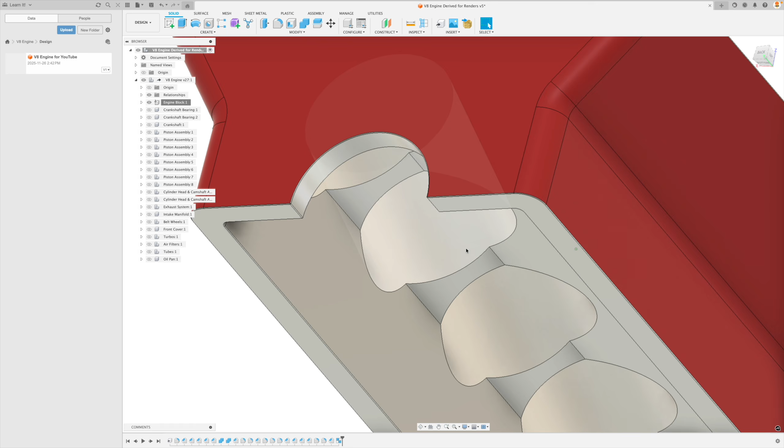In the second tutorial of our V8 engine series for beginners, we will model the engine block. This will be presented in two parts, as there will be a lot of fundamental principles of design taught, including how to create a new component, extrude tool basics, sketches, circular pattern, two-sided extrude, how to change the material and appearance, and so much more.

So basically we're going to take this, and there's a lot of little details here that you probably will miss, but that's why we're doing this together. We're going to learn how to read drawings and make them right. So first thing we're going to do is look for the root sketch feature that everything else is based off of. And if I look really closely, I see that the first cylinder bore has a lot of dimensions coming off of it. So that's the one I'm going to pick.

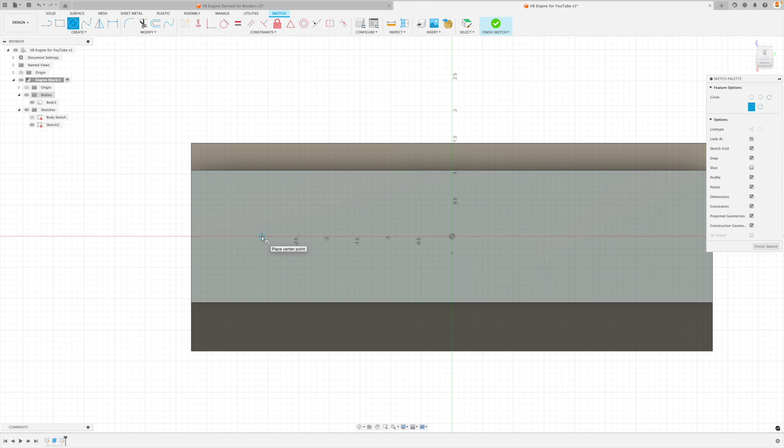Let's go center circle. I'm going to place my mouse cursor right here on the x-axis. Here's a fundamental thing within Fusion. Despite our mouse cursor snapping to the grid, it doesn't mean that it is constrained. So if I create a circle right here, don't worry about the dimension. I guess I could put it in right now, but don't worry about it too much.

Okay, look at our center point. It's not constrained to anything. So even though I snapped it to the x-axis, it's not constrained to it. We have to constrain it. So go to your horizontal vertical, grab your center point, grab the origin, and now we're getting rid of its degrees of freedom. We can move it left and right, but we can't move it up and down. So that's perfect. That's all that constraints are. We make sure we are accurate and our design is perfect. So this is perfectly in line with the center.

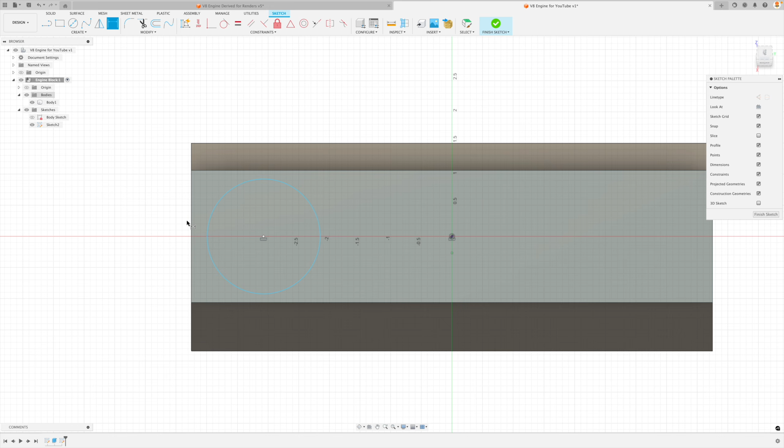Now, where's our dimension coming from? D for dimension, grab the outside edge and the center point. We can actually click anywhere on the circle in this instance. Because a circle has an infinite amount of points, Fusion recognizes when we pick a circle, it selects the center point for us. So I'll prove it to you. There we go. Little side point, everyone.

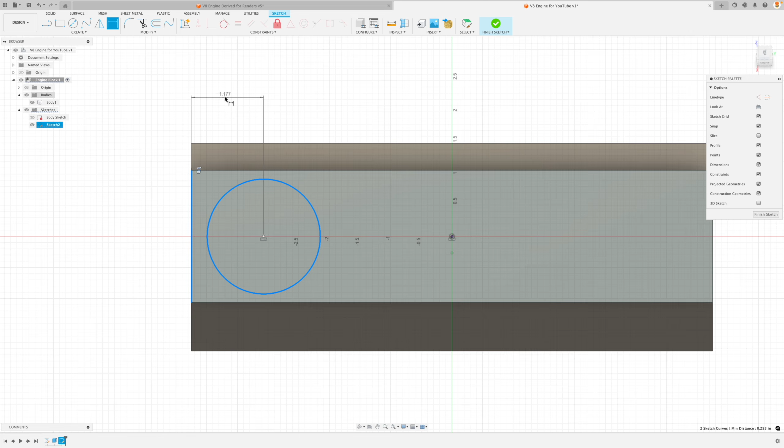If we want to go to the point of tangency on the circle, go D for dimension, select the line, and before we pick the circle, right click. And here you go, pick circle arc tangent. And then we can pick any point that's tangent. So it's either this or that side. And here we can specify that little dimension right there if we want. But Fusion defaults to just the center point. So there we go. Place the dimension where it is on our drawing, 1.1875. Awesome.

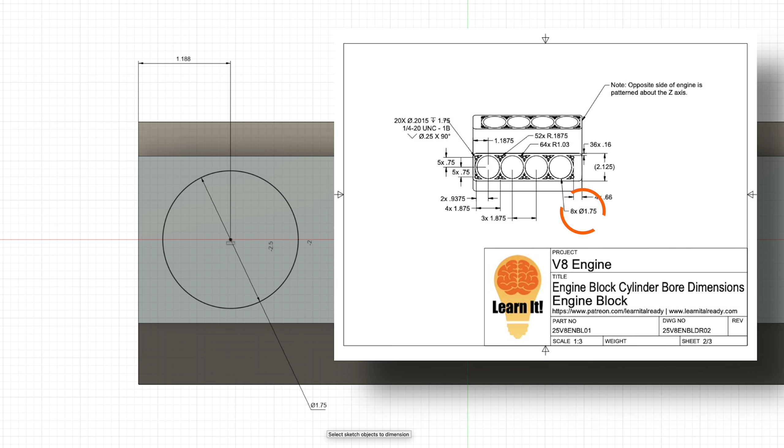Why is our sketch still not constrained? What's missing? The diameter. So let's grab this, move it on down, 1.75. You see that we can't make our sketch within Fusion look exactly the same as our drawing, and that's okay. Basically, we're trying to put our dimensions in approximately the same location, and that's just for visual reference to quickly scan with our eyes, are all of our dimensions accurate.

You'll notice here 1.188, if we hover over it, Fusion just defaults to 3 decimal places. So if you hover over it with your mouse cursor, you can see 1.1875, so that's accurate. And what I always like to do with my students is I like to encourage them to highlight or check off each dimension so we're not missing anything. Great, let's keep on going.

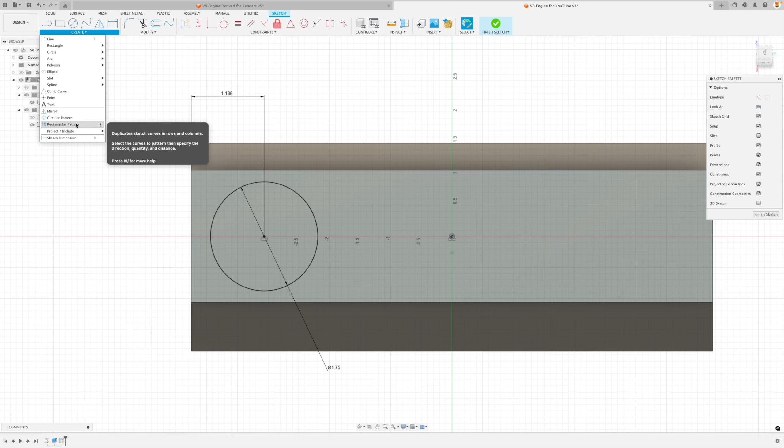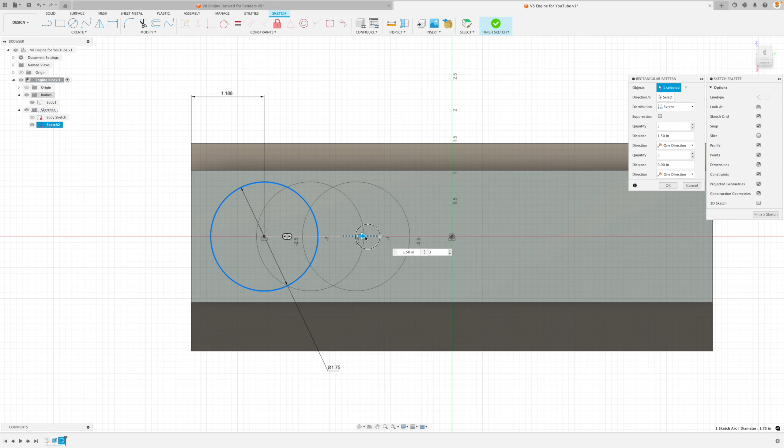We see that these 4 bores are equally spaced 1.875. So why don't we do that now? Let's go create, and I'm going to go to rectangular pattern, select the object, and now let's talk about this. This frustrates a ton. Here we have 2 different directions. We've got a quantity of 3 and a distance, and we've got quantity of 3 and a distance. Both of them want to go one direction. Instead of fiddling with this dialog window, grab the arrow of the direction you want to move in. So I'm going to grab that. There we go.

How many bores do we want? On our drawing, it says 8, and that's including the 4 on the other side. Okay, so let's go quantity of 4. And now instead of extent, so that's from center point to center point, I want to go to spacing. And now you can see we have a couple different ways of inputting this. We have this little dialog window right there, and we have this big one over here. They're exactly the same thing. This is just closer to our mouse cursor. So I'm going to type in 1.875, just like that.

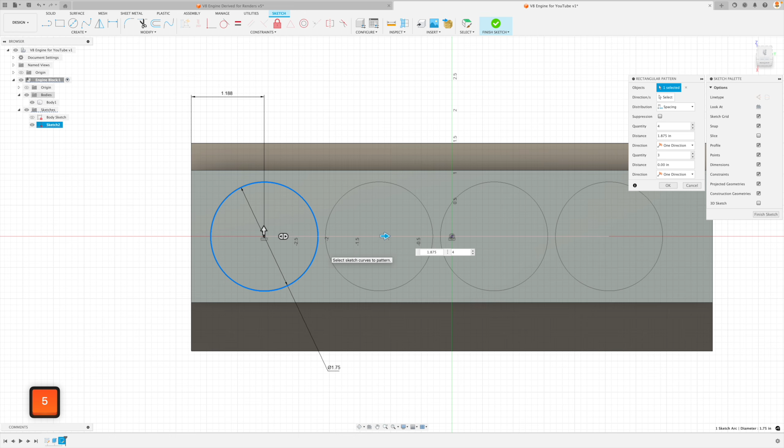Enter. Everything is fully constrained. This is looking great. This is looking really cool. Now, here's a funny thing. Remember I talked about the dimension being placed over here, where on our drawing it's over here. Why don't we just switch it?

Now that we've patterned that, let's delete that. All of our circles turn blue. Now if I constrain or dimension this 1.75, all of them turn black. All of them are fully constrained because they're copies of each other. That's what patterning does. Very good.

Let's keep on going. There's a million things on our drawing here, so let's figure it out together. This is great. Because I've already designed this, I know how I would approach this, but you might approach this a different way. So I encourage you to pause right now, try and do the rest of this, figure out what's going on in the drawing if you can, and try and design it. It's extremely easy if you know the technique. If you're ready, let's keep on going.

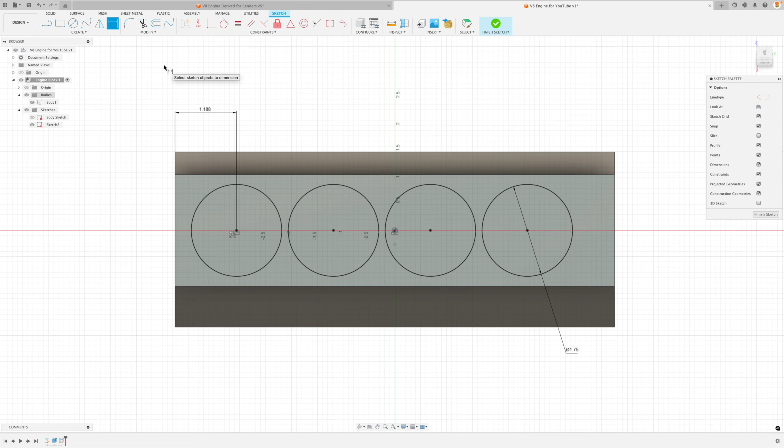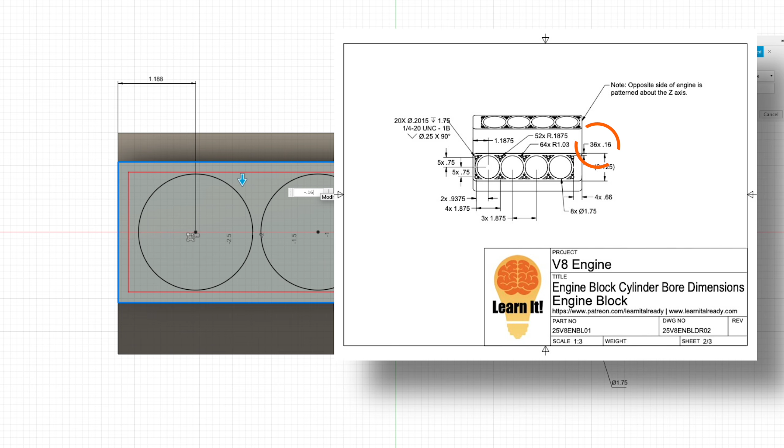I'm going to create an offset right now, and I'm going to pick this entire rectangle. Move it on in, and you can see we've got a value right here. This is minus 0.16. On our drawing, it says that there's 36 times that. Well, when you calculate all of them all the way around, there's 36 features that have this dimension on both top and bottom. So I'm going to go minus 0.16. It's minus because it's inside.

On drawings, you never really see a negative integer. I don't think I've ever seen one. So you have to interpret that within Fusion. So I'm going to go minus 0.16. So that's 0.16. Bring it all the way on over here. There we go. Let's put it up there. It won't allow me to put it over off to the right here. So 0.16.

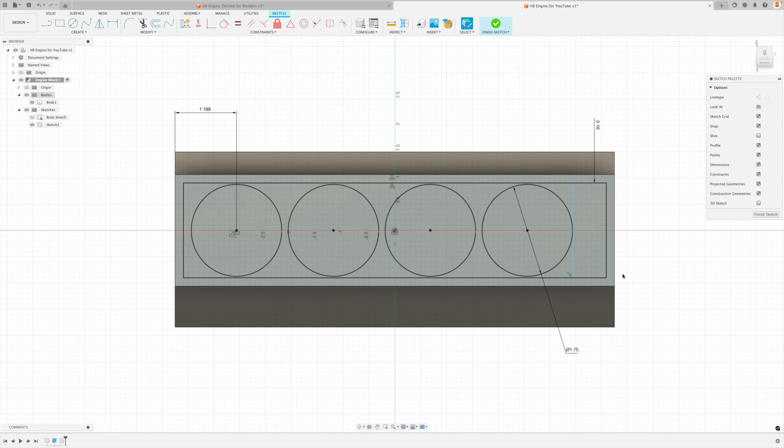Now here's the thing. This line on this side, let's put it in, is not 0.16 away. This is the special exception. So if I go D for dimension and I go like this from there to there, perfect. This is 0.66, just like that. So that looks great. Let's not try and overlap any dimensions. Sometimes people will put their dimensions like this and you can't see it. So just make your sketch look pretty. If it looks pretty, it will work.

Okay, very good. So what else do we have? This represents all those different features around our drawing, but then we also have some radiuses, 52 radius, 64 radii, I should say. So let's do that. Center diameter circle. These are our bores, right? Let's go in and create the other ones as well. This one here is going to be a radius of 1.03. So remember how to turn this into a radius. D for dimension, select our circle, right click, radius. Okay, this is going to be 1.03, just like that.

And then we have our 52 times radius specified there as well. Now, what this is representing are the inside of all those profiles. So why don't we do this? I also would like to pattern this circle down the line. Very simple. Go into your pattern, right click. We can edit it or we can double click. It's the same thing. Objects. If I want to copy an additional object, hold down Command and select the other circle. And that adds all of them right there. Brilliant. There we go. This is looking really good.

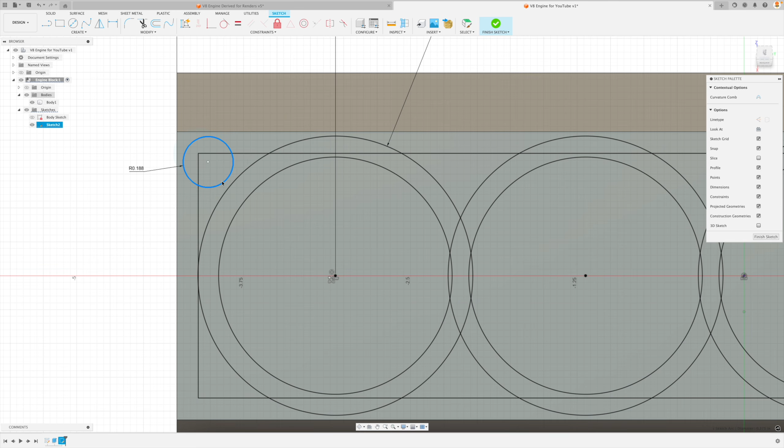I could delete one. Actually, that was the correct one. No, it wasn't. You can see this circle is still constrained to that endpoint. So that was the wrong constraint. I can try the other one. Yeah, there we go. Okay, so let's just do that. You can recreate a circle right there, but the endpoint doesn't belong right there. That was my bad.

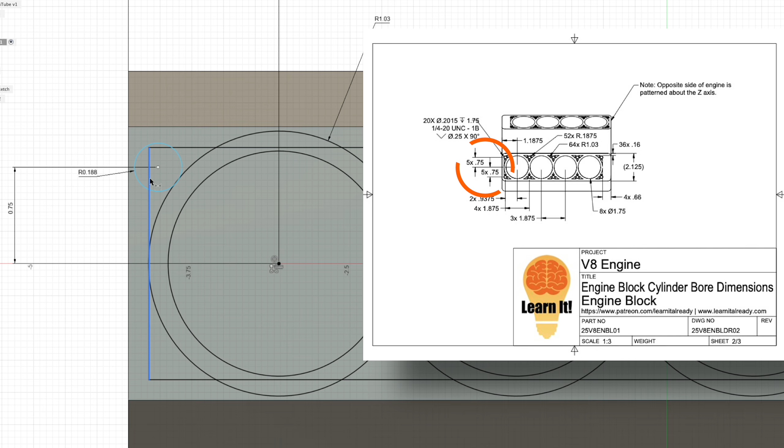Here we go. Let's specify the dimensions. D for dimension, center point to center point. Do you see what this value is supposed to be? It's supposed to be 0.75. This value to the center point, the horizontal value, is supposed to be 0.9375.

There we go. So this is actually going to be the cutout. This is the other cutout right there. This is looking great. Very good. Now here, we're going to pattern this sketch entity all the way around right here. And this is going to be fun.

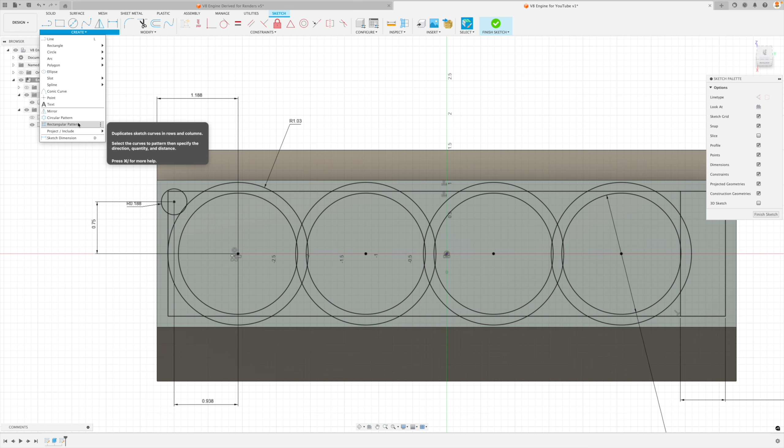Let's go to create rectangular pattern, pick our circle, and here we have two directions. So I'm going to go this direction first of all, and then pull your arrow down. Pull it in the direction you want to go first, and then adjust the values after. So in our down direction, change this to a quantity of 2, and we can even pull it into place.

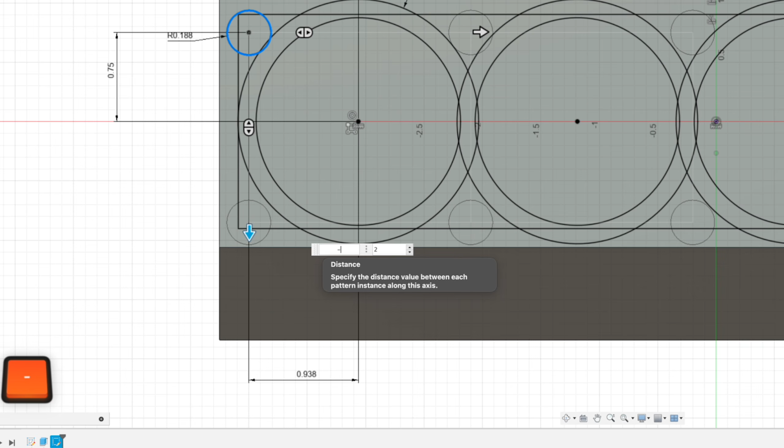Let's grab our dimension right here, and this is supposed to be 0.75 times 2. This is where we have to do a calculation. We're going downwards, so it's a negative value, minus 0.75 times 2. Now in our other direction, don't hit enter yet. Grab our arrow, and how many do we want?

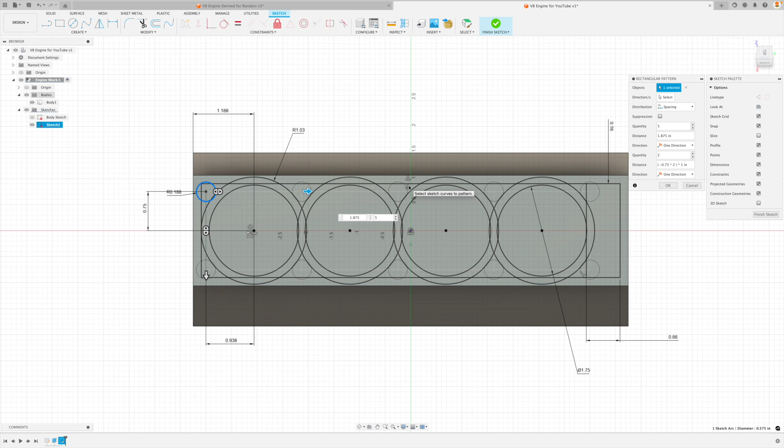Quantity of 5. And the distance between each of them is the same as our bore, 1.875. There we have it. And you can see they're all perfectly placed right here. So this is looking really good. Enter. One mistake I've made, this 0.66 dimension over here is not from this edge, but from the outer edge.

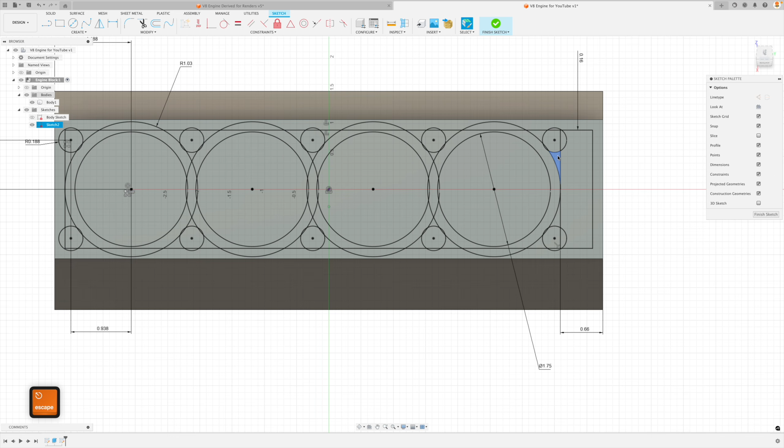So I'm going to delete that. Just grab your arrow, pull it back a little bit, doesn't really matter. D for dimension, select those two lines, and this is supposed to be 0.66. So all of these closed profiles are going to be cut out. Otherwise, I think that we've got everything on the screen.

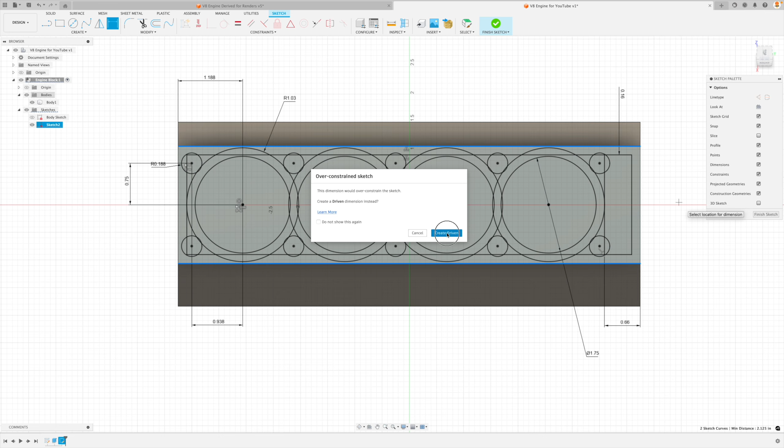Now, one thing you'll notice is that there is a bracketed dimension, 2.125. So if I go D for dimension and I select this line and that line, this will be a driven dimension. So it's based off of something else we've already defined. And that's why we see a bracketed dimension on our screen. If it's defined in another drawing, then you'll see in our sketch, this should be also a driven dimension. So that's what that's referring to.

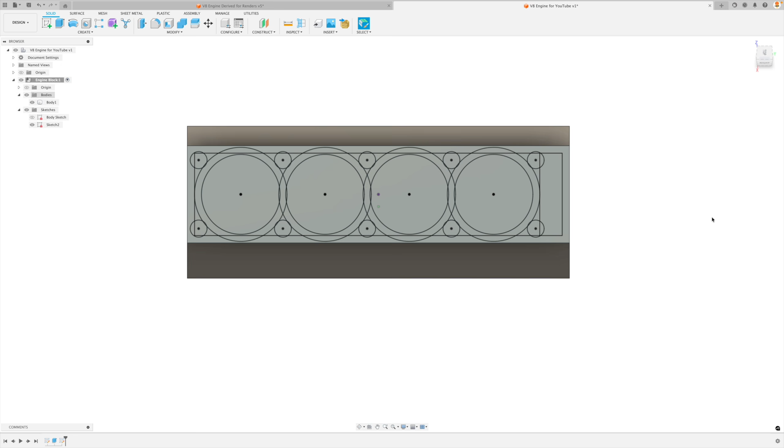This is great. Let's go finish sketch. Now we've got everything representative of what we want to cut out in our part. Now, do we go ahead and use the extrude for these? We could. There's nothing wrong with that, but I'm not going to use extrude. I'm going to use the hole tool.

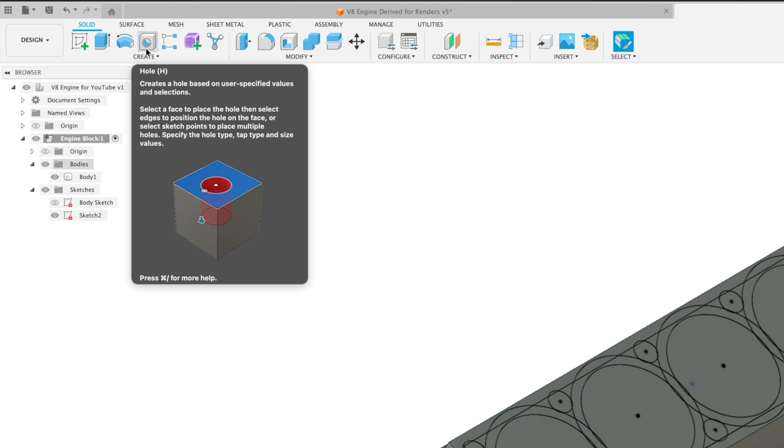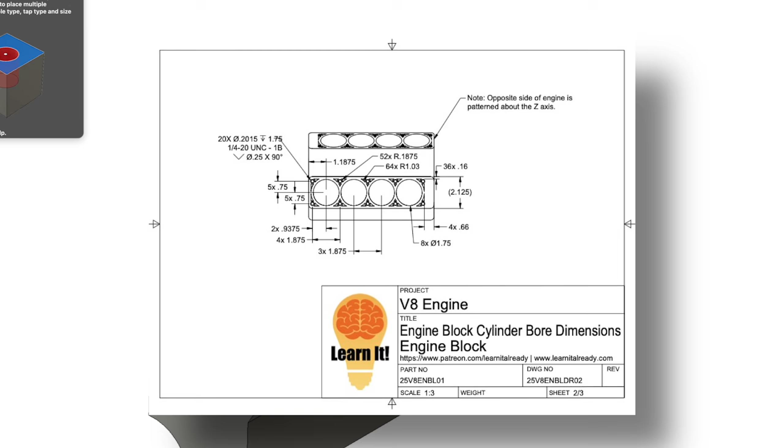The reason is when we use the hole tool, this has a bearing on our drawing in the future. When we look back at our drawing, you can see, for example, the 1/4-20 definition. That's all automatically inputted by Fusion. It makes life a whole lot easier. Rather than inputting all those symbols and all that structure, Fusion does it automatically and it does it professionally for us. So I would like these cylinder bores to use the exact same method.

So let's click on the hole tool. I'm going to pick the center of all of these. Very good. Distance, let's leave this for a second. We want simple, that's fine. Hole tap type, simple, don't worry about this. We just want to focus on the diameter. It's supposed to be 1.75.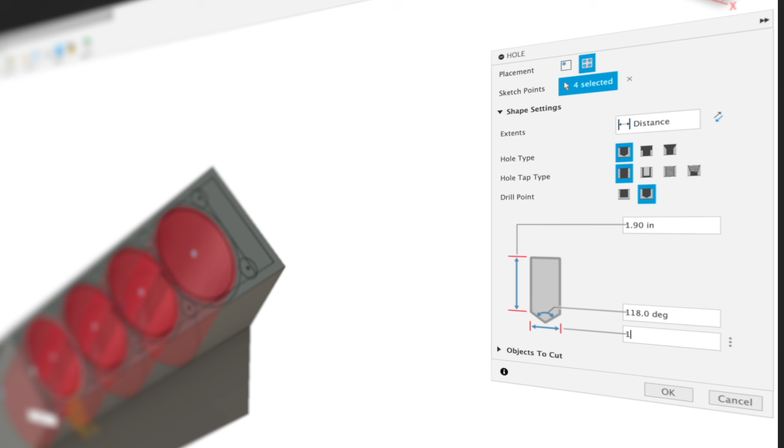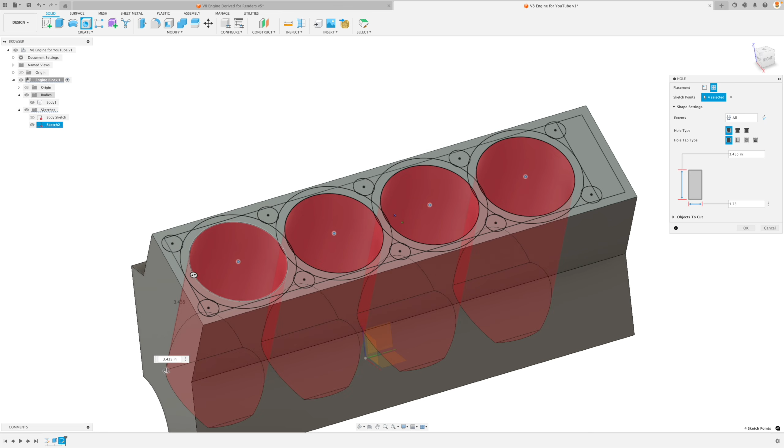Now go distance, and we're going to go all. So now this goes all the way through right there. This is looking great. And why is our dimension a little bit off? That's why, because it's not 1.875, it's 1.75. There we go. All right, perfect. We've gone all the way through.

On our drawing, it's now not going to specify a distance, because the distance is actually right here, 3.435. We don't want a distance. We just want to say to go all the way through. And that's what Extents does for us. So let's go OK. Our sketch now disappears. That's fine. Let's go back to it.

We should rename it at this point, and I'm going to call it something like our cylinder bore face sketch. There we go. Let's bring it back. Let's make it visible by clicking that eye. Everything comes back. Let's put in our other holes, our tapped holes right now.

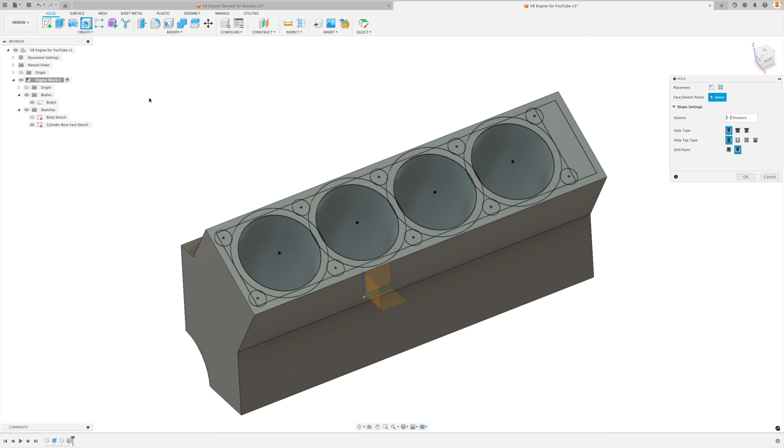So we'll go back to our hole tool, and I'm going to pick all these other points. And don't worry about how big the hole is right now. That's fine. Just pick all of your points, just like that. And now we are going to just go down the line here. This is actually a countersunk hole. That's what you see, that V on our drawing, 0.25 by 90.

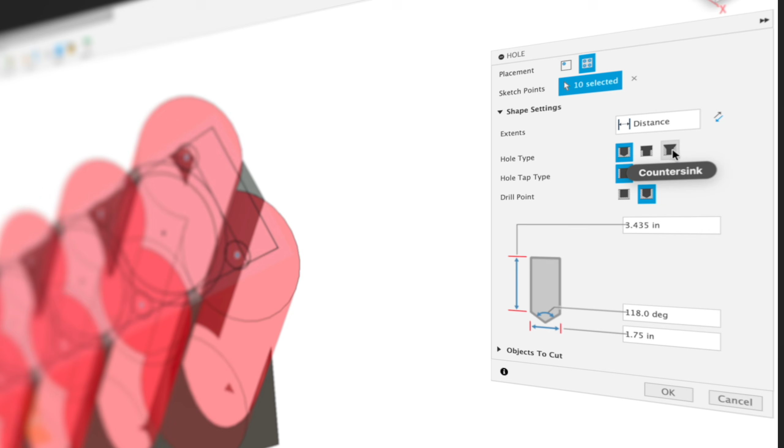So go countersink, and let's just put in our values. This is actually going to be 0.25 by 90 degrees. The depth, do we have a depth here? Yes, it says down 1.75.

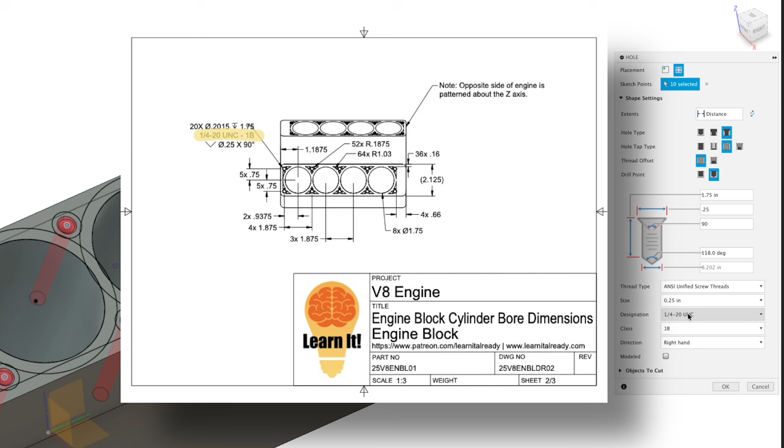118 degree, we don't really worry about that. That's just dependent on our drill tip. And then our diameter. We don't need to put in a diameter here because we're actually going to go to tapped. Fusion assumes that we want a number 12 tap. We're just going to pick that size and change it to 0.25, which is 1/4 inch. Supposed to be 1/4-20.

This is looking great. And when we look at our 3D model, you can see that we're going down 1.75 inches. Everything is great. Class is 1B. We are good to go. Let's go OK.

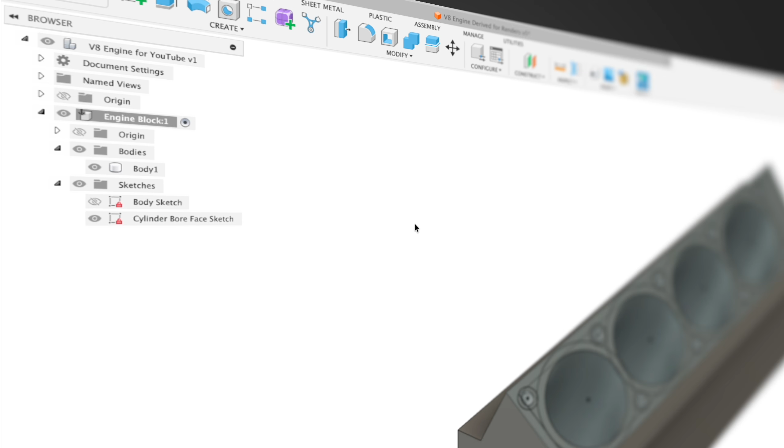Here's another tip. We had to make our sketch visible to see this sketch again. Once we've made it visible, Fusion will keep it visible. Our first extrude or anything we do on that sketch, Fusion will automatically hide it. It assumes that we don't want to use that sketch anymore. But here we want to use it, so we've made it visible, and we're going to keep on using it to create the other 3D features as well.

And where are those? So each of these closed profiles right here, the dimension is somewhere. Can you find it on sheet number 3? Well, there it is, 1.5 inches deep. So I'm going to select all of these different closed profiles and then extrude them 1.5 inches in. This is going to take a while to select all of them. Let's speed it up.

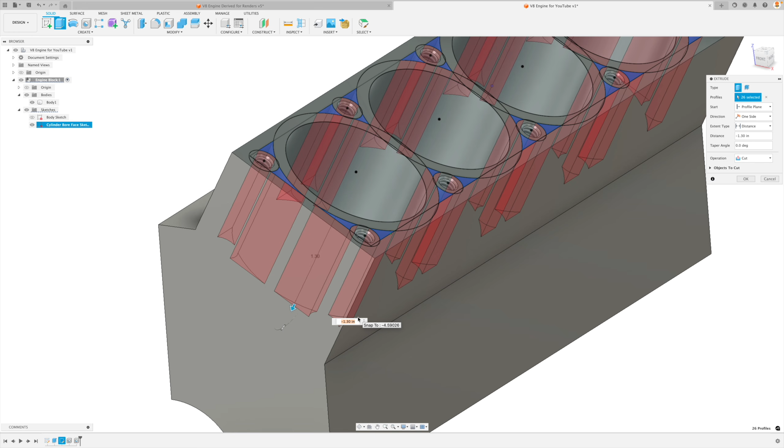Okay, now that I've selected all of them, I can go down. And here, if you don't know which way to go, just grab your arrow, bring it on down, and it shows that it's a negative value. So this is supposed to be negative 1.5. Press enter.

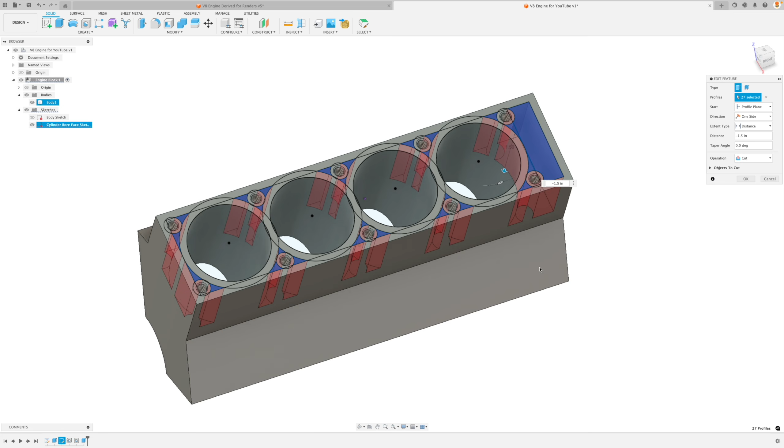If you've accidentally picked the wrong closed profile, don't worry about it. Just go into your extrude in your timeline. And here you have 27 selected. Let's assume that you've accidentally selected that. Oh, well, we don't want to extrude that. So go back to your extrude, hold down Command, and click it, and it will deactivate that closed profile. So go OK. Now we want to hide the sketch, and this is looking really, really good.

Okay, so at this point, this is where the benefit of using mirroring, or better yet in this instance, circular pattern comes in. What is the difference between both of them? Well, using mirroring will actually create completely different holes and features on the other side. It's like a brand new body. They're not the same. Although they look the same in this instance, remember that mirroring creates a brand new body.

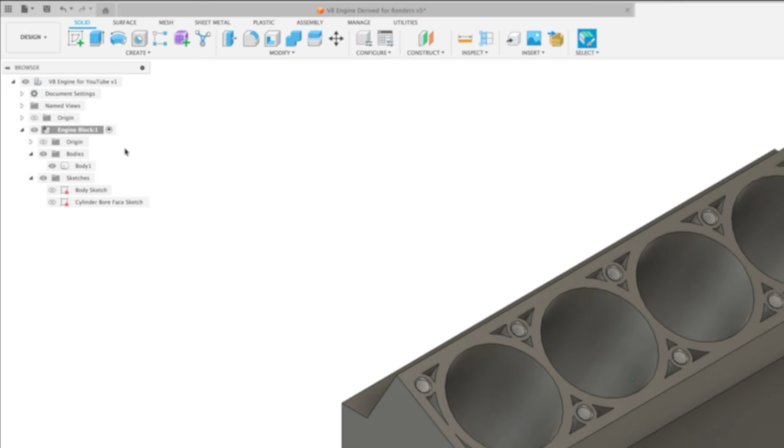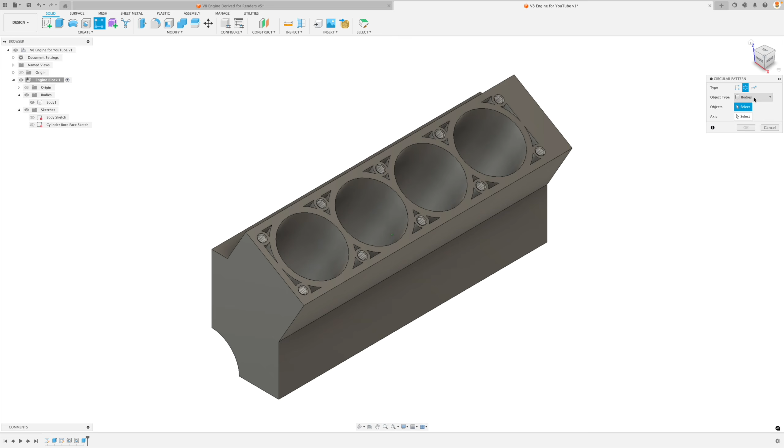We want to go to pattern. And although we don't want rectangular pattern here, look at what happens. If I click on that, we can actually pick other options of our pattern. And that's in the create drop-down menu as well. Hovering over pattern, we have a bunch of different patterns that we can pick. Well, they're right here as well. Let's go circular pattern. I'm going to keep it on bodies, and I like to pick this body.

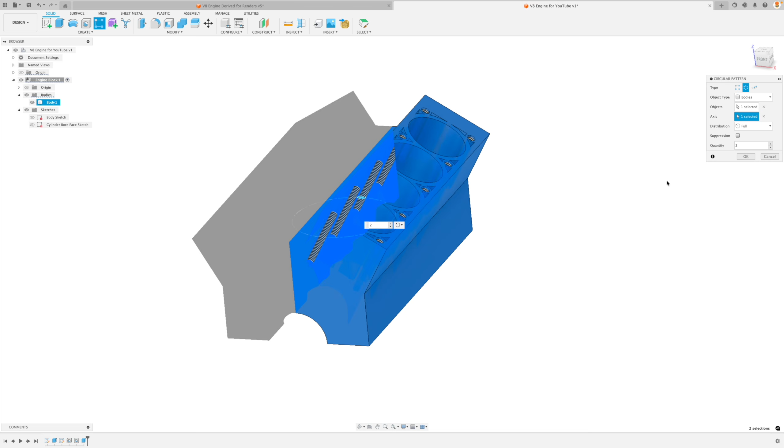And now here's the whole point of drawing this and building it around the origin. So let's go axis. Our origin shows up, and I want to pick the Z axis. Now this is putting 3 bodies in. So let's just change it to 2 bodies. Let's go 2.

Now look at the difference. You can see that this body over here, we've got a short distance between the sidewall and the bore. And here is a wide distance. Same thing over here. Here's the wide distance and here's the short distance. That's exactly what we want because our crankshaft and our piston assemblies need to be staggered. That's how an engine works. So that's why these cylinder bores are staggered a little bit.

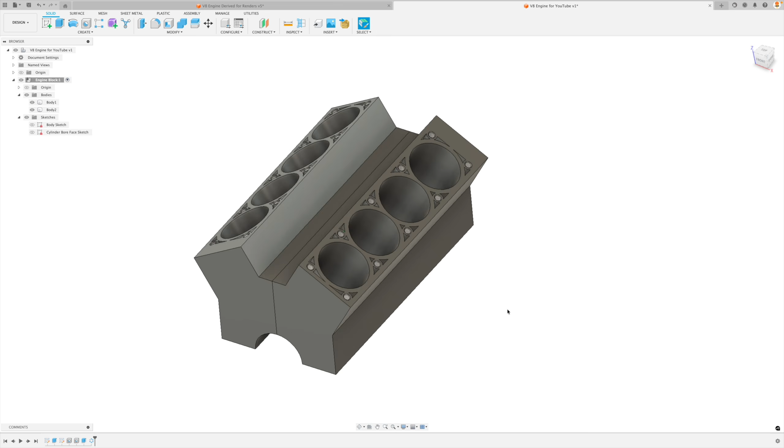But the reason we can do that so easily is by creating a pattern using the circular pattern tool. It's hard to wrap your head around that we're using these rectangular looking parts with the circular pattern tool. But that's exactly what we want. We wanted them to revolve around that Z axis right there. Now, how many bodies do we have? We have 2 bodies. So I want to combine these into 1 body. So I'm going to go up here to our Modify menu, Combine.

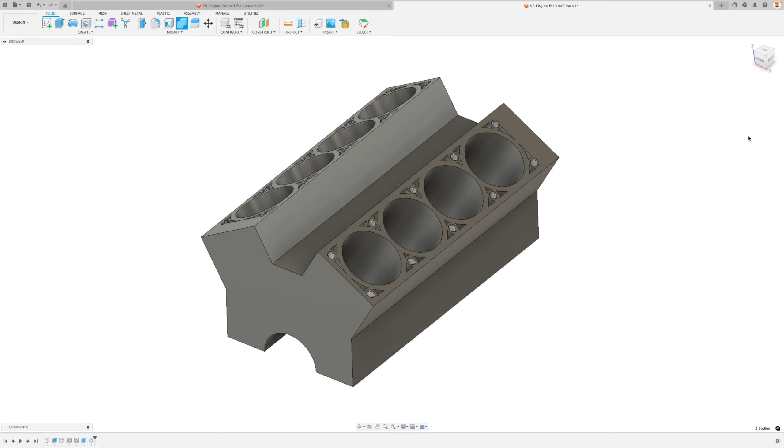The target body, keep it as body 1 as our target and our tool as body 2. It assumes that we want them joined together. Let's go OK. And now we have 1 body again. That seam disappears halfway down our engine block.

And let's just look at our timeline for a second. Look at all the things that we have here. This is everything we've used to create our engine block so far. So our first sketch, our body sketch. This is our first extrude. This is the cylinder bore face sketch. If we hover over that, it actually tells us which one it is.

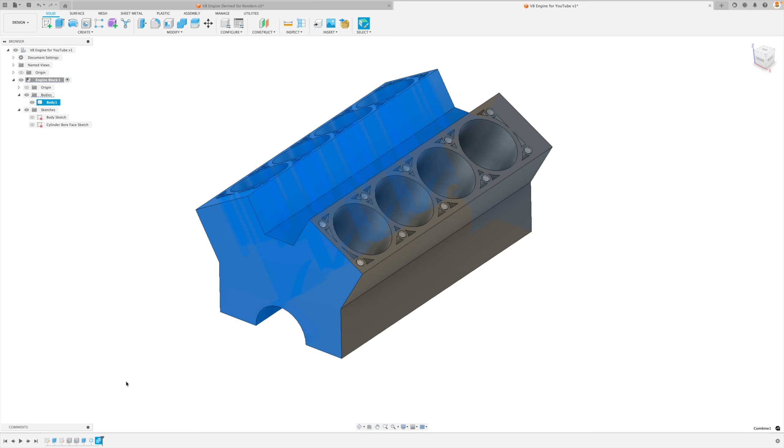We've got our cylinder bores. We've got our bolt holes. We've got our extrude. Those are a little reliefs right there. Our circular pattern wraps that body around and then it joins the 2 together just like that. So this is looking great.

Now, what else do we need to do? We need to hollow this body out on the inside. So let's do that now. Let's create another sketch. And actually we can create this on any face we want. Just to prove it to you, I'm going to do 2 different ways. Let's pick the XZ plane.

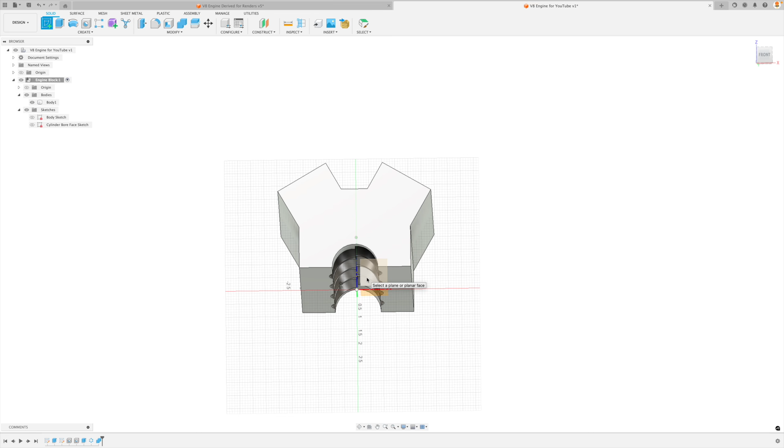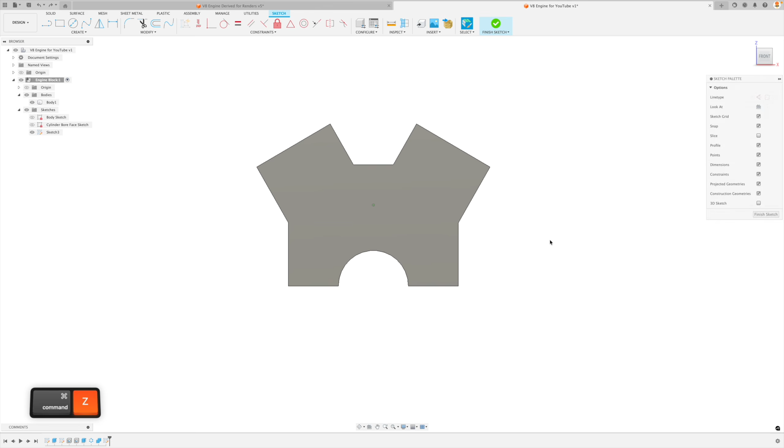Now we've got this body right here. I'm going to go slice and we can see right through. The problem with doing this is that it's a little complicated. It's hard to see our sketch profiles that we want to create. So instead of doing it this way, feel free to try it if you want. It's okay. I'm going to undo that sketch. I'm going to create another sketch on this face.

Now, I am going to create this as a hexagon. So let's create a polygon and we can just do an inscribed polygon, start at our origin, move this on over, and this dimension is supposed to be 1.825. Just like so. Is everything locked in? No, this needs to be horizontal.

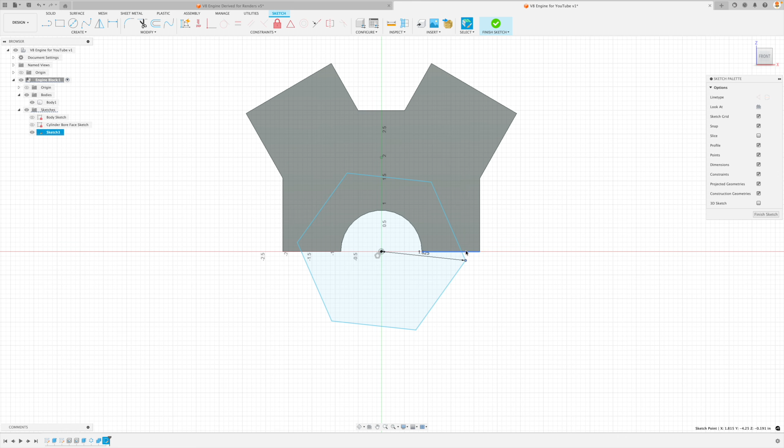So actually, hold on a second. It needs to look like this, doesn't it? So this line right here needs to be vertical. So let's just click it, vertical, horizontal constraint. It automatically applies this vertical constraint to it. And this dimension is actually wrong. I picked the wrong type of polygon. So I'm going to delete that.

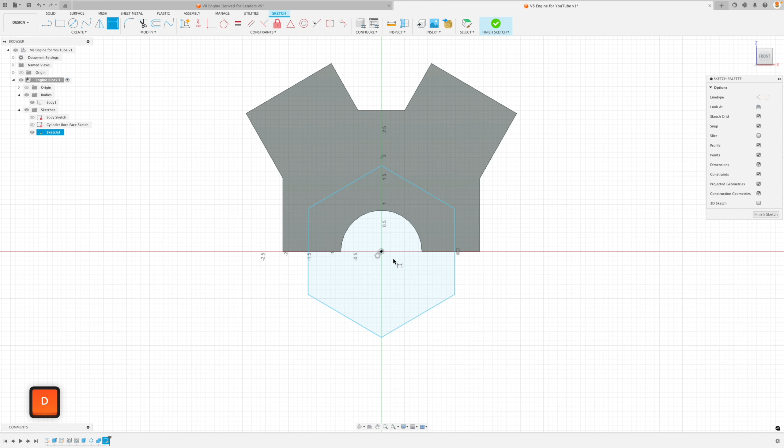And now it's very simple. Just go D for dimension. Go from the center to that line. There we go. 1.825 is the dimension. It also has a reference 0.3. This is just to verify that we've done this right. So create a driven dimension, brackets just like we see on our drawing, 0.3. This is looking great. So let's finish that sketch.

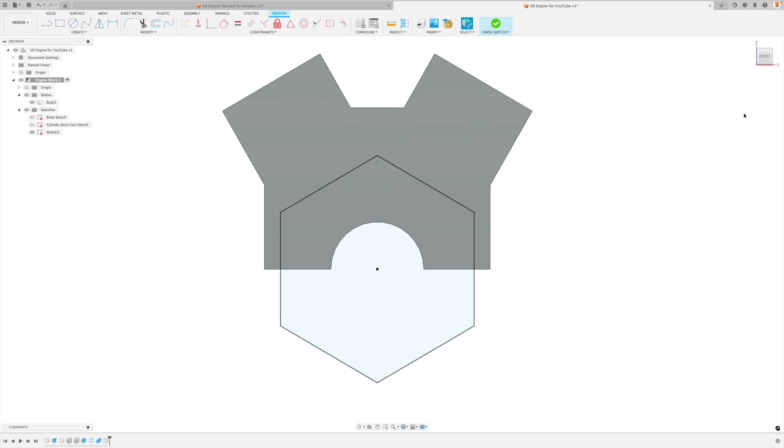And now what we can do is use this closed profile to do the entire cutout of our engine. But obviously we don't want to go all the way through, so I'm going to show you a brand new trick here. Let's go to Extrude, grab that profile, and here's a little tip. So we want to go this direction, right? But instead of one side, I'm going to go 2 sides. And usually we think of 2 sides going one way and the other, but in fact we can grab 2 sides and go in the same direction.

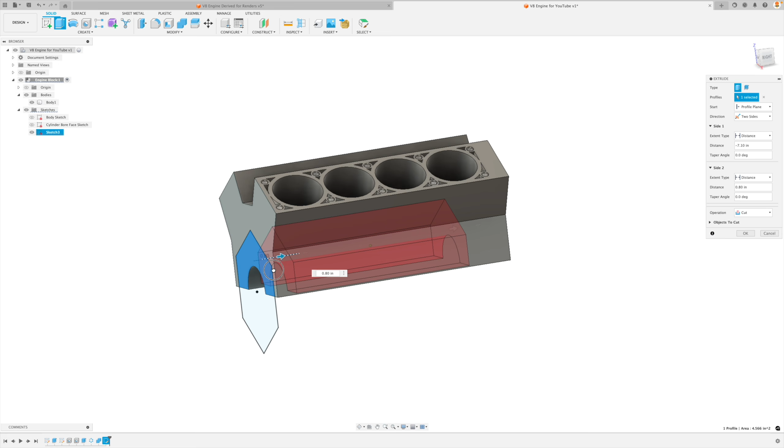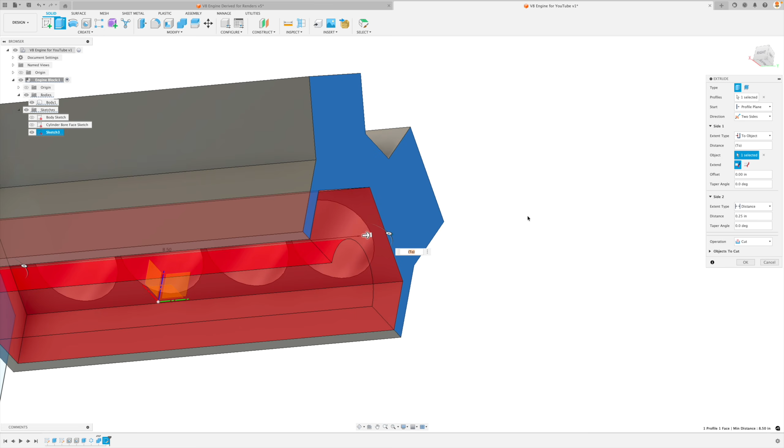So the first one, this is going to move on over 0.25. So the cutout's going to start 0.25 from that wall. And this one over here, look at this. Instead of doing the math, let Fusion do the calculation for you. Instead of distance, go to object, pick that face, and then we've got an offset over here, minus 0.25. There we go. So we've got this beautiful cutout. Let's go OK. It hides that sketch. We've got this entire block looking great right now.

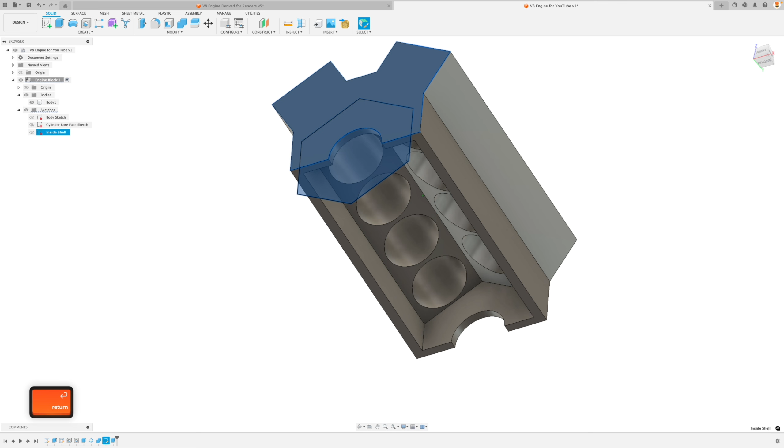Let's just rename that sketch over here, and we're going to call it the inside shell maybe. Call it whatever you want. This is just to easily refer to it later on. It's best to get into good habits with correct naming conventions and things like that, but don't worry about it too much in this course.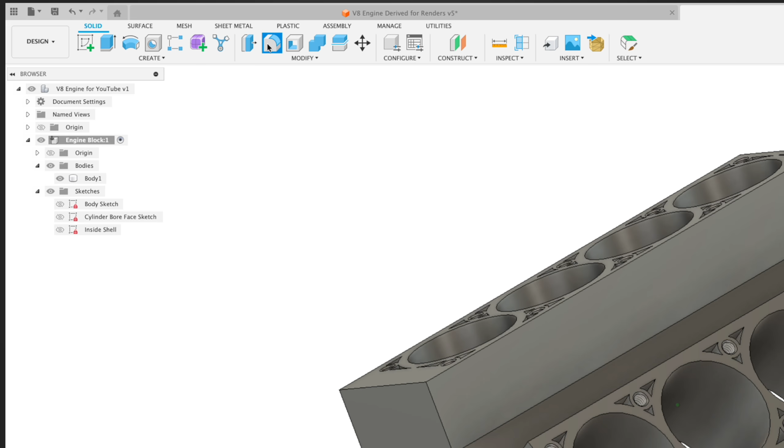We actually need to pick all these different edges as well, but by picking these long edges first, it's going to turn this line, that line, and that line into a tangent chain, and it's going to make our life a whole lot easier. So let's go 0.25, just like that. And now if we go back to fillet, look at this. If we pick that, it actually selects 5 edges with 1 click. Boom, that's 2, 3, 4, 5, and we can actually look through our part. This is kind of hard, so we're going to have to rotate.

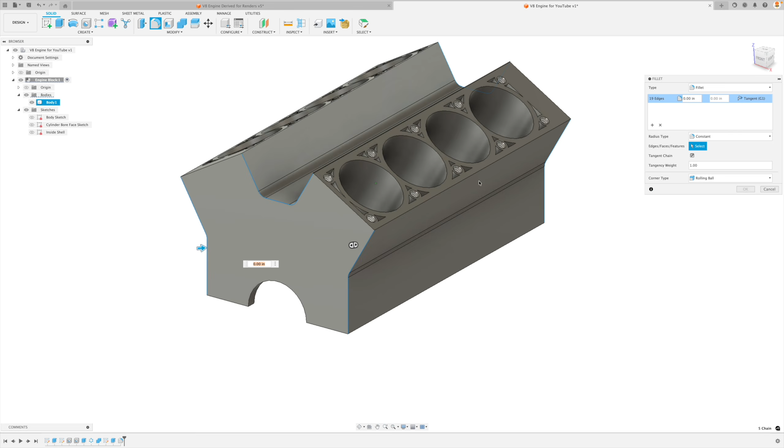That's probably easier, or orbit, I should say, and call that 0.25. So that's it right there. That is our entire engine block. Now we're not quite done yet. We have one more thing to get to.

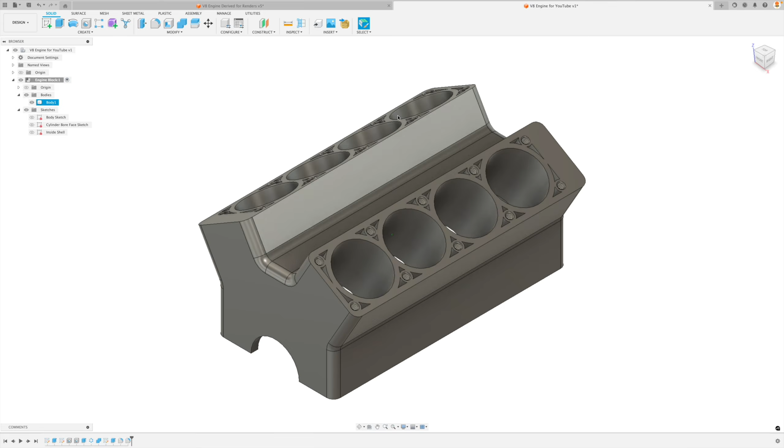So the last thing we're going to do here is we are going to turn this engine block. We want to make it accurate with its material. So let's just minimize these folders, the bodies and sketches. Under engine block, I'm going to right click, and let's first of all go to physical material. Here, we're going to go to metal and find aluminum. Let's just go regular aluminum, drag and drop. There we go. The default in the system is steel. It has to have steel in the design if that's our default. We've added aluminum, which is great.

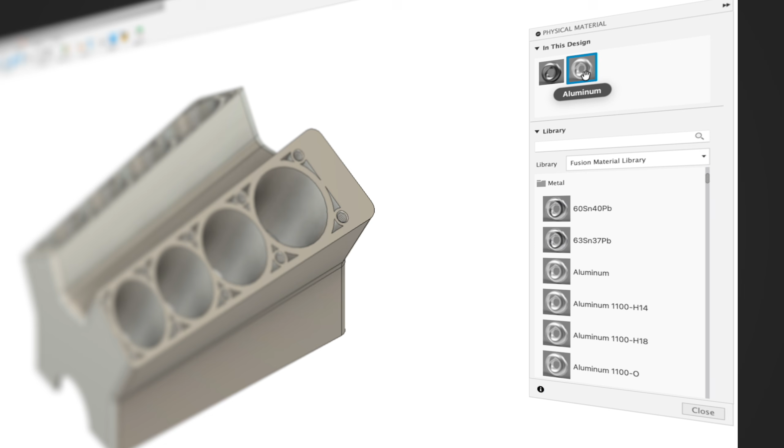But I'd also like to add an appearance, and I'm going to make this engine block red. So let's go A for appearance. Just to let you know, you can also go right click on engine block and go appearance. You can also go right click anywhere. And I believe appearance is there. No, it isn't. Right click on any aspect of our design. You need to click it first, and there's appearance down there. But just get used to A for appearance.

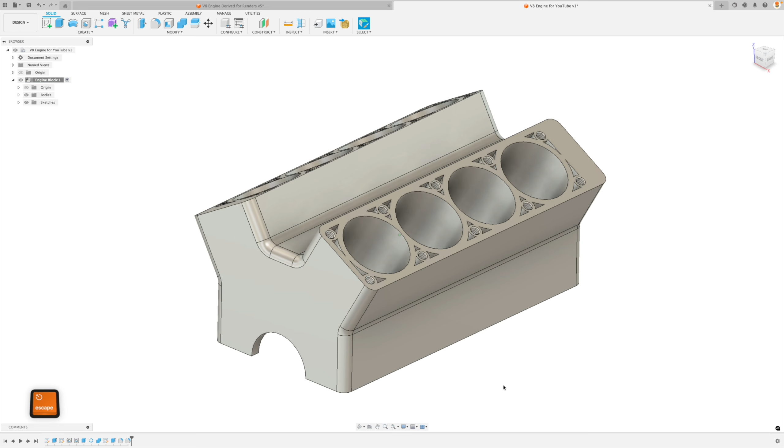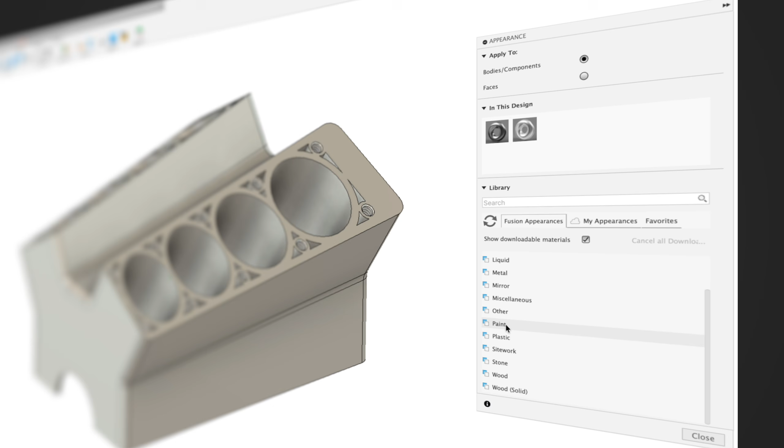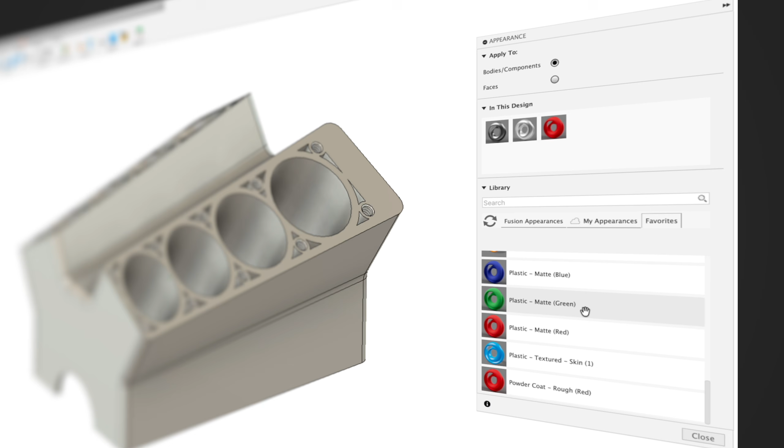A, there we go. I have selected in my favorites, I've got the plastic matte red over here. I've got other reds, but I don't want that. I would like to save in my Fusion appearances as a favorite. I'd like to save a new type of appearance. So if I go to paint, let's go there and let's go to powder coat rough. Here we go, powder coat rough red. I kind of like that. I would like to use this, so I'm going to drag it up into the design. Let's not apply it yet to anything. And then in fact, I want to right click and I can add it to my favorites. So now when I go to my favorites tab, there is the powder coat rough red, perfect.

But I don't want to add this red to everything. I just want to add it to the external faces. So I can go faces, and then I'd like to add it. Now, I could do one of two things. I could make it all red and then add the aluminum satin appearance to the places where I don't want it to be red or machined, or I can just add this later. And I think I like this more.

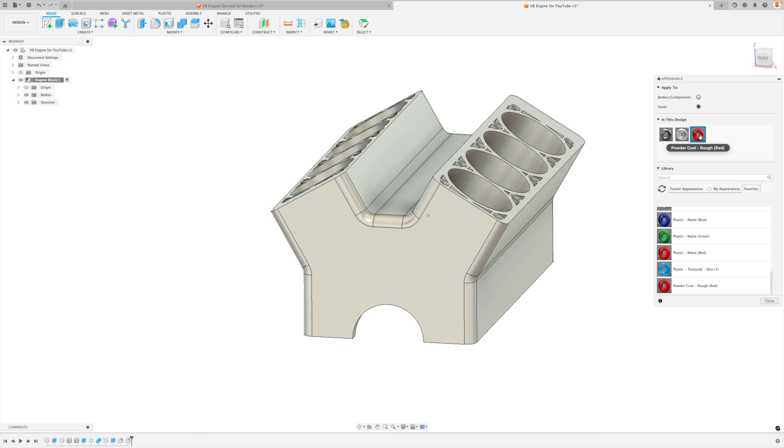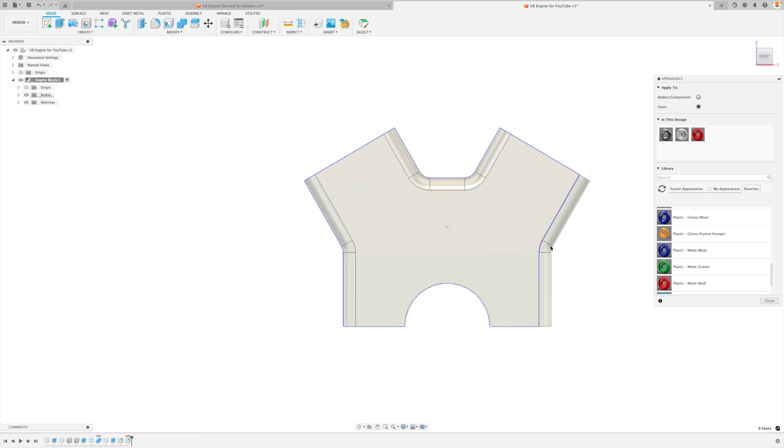Now, what I'm going to do is let's just go to front. If I select, let's go escape there. A for appearance, faces. Oh, and this won't let me over here, so that's fine. Let's just go faces, and I'm going to pick all these using Control on Windows or Command on a Mac. Let's just select all those faces and drag and drop that red right there. And I'm going to repeat this all over. We can just go like this too. Drag and drop. There we go. Let's pick the other ones on this side. And there we have it.

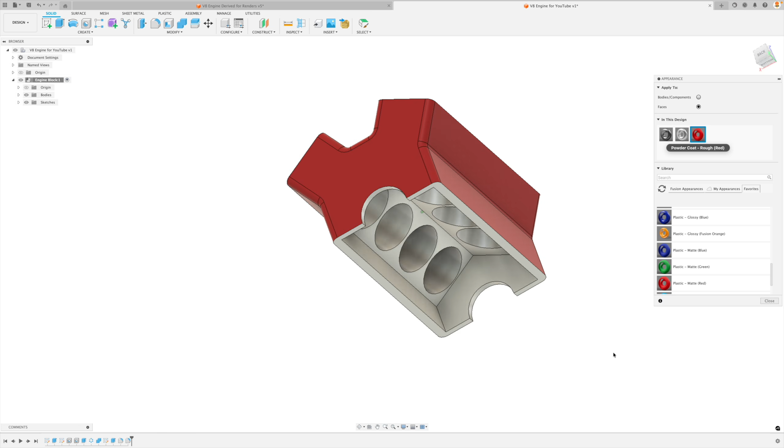So everything else is going to be machined. I think this is looking great. That's exactly how I want it right now. And make sure to save. And we should have actually been saving all along the way. So at this point, remember, we are going to save the little aspects, the little features, the little details of this, such as chamfering, for when we do the renders, because for our drawing package, it's a whole lot easier to read when we don't have a million chamfers on our part. So instead of adding them right now, we're going to save that to when we start getting into rendering. But for now, this is our finished engine.

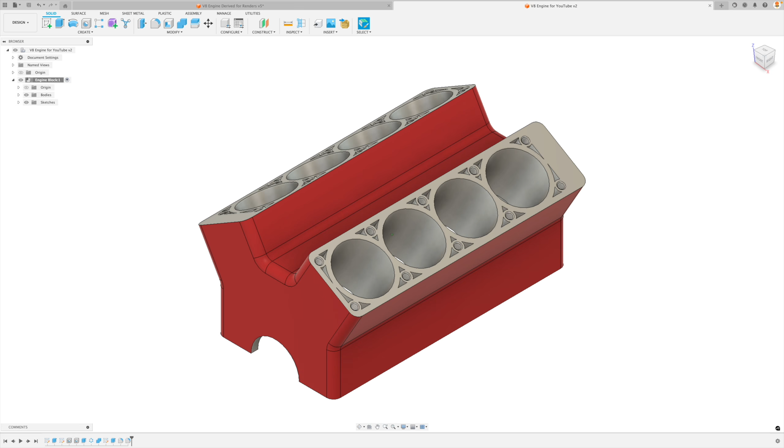Hope you stay tuned to the next tutorial when we're going to get into the oil pan. Let's just take a look at that real quick. In our render over here, I'm going to find the oil pan. Where is it? There it is, isolate. And here is the oil pan that we're going to work on. So this is going to be really cool. Hope you stay tuned for this.